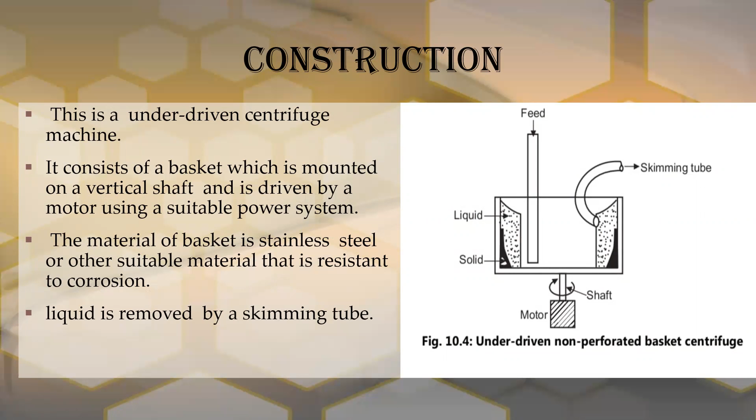Next point, uses of this centrifuge. This type of non-perforated basket centrifuge is useful for separation of solid and liquid from a suspension containing a high proportion of solid, that is, in cases where the solid offers high resistance to the flow of liquid.

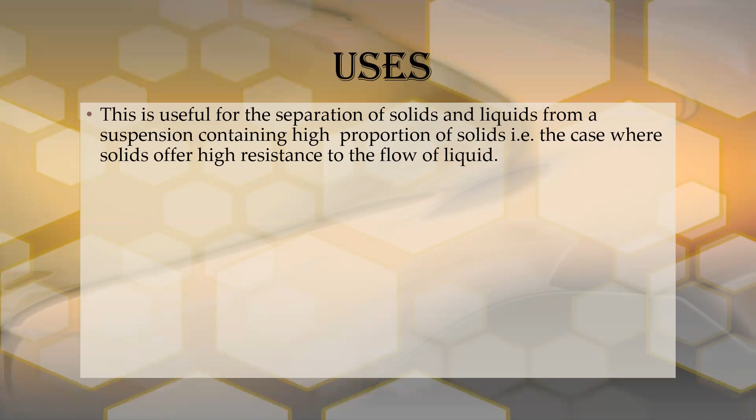Next point, there is next equipment or next centrifuge, that is semi-continuous centrifuge. So the principle of this semi-continuous centrifuge: it is a short cycle automatic filtration type batch centrifuge, a simple short cycle automatic filtration type of batch centrifuge.

The separation of the solid and the liquid is through the perforation wall, similar to a perforated basket, which is based upon the difference in density of the two phases, that is the density of the solid particles and the liquid phase. So this is the principle of this semi-continuous centrifuge.

Next point, construction of this semi-continuous centrifuge. See the diagram, it consists of a perforated basket, a vertical perforated basket. This basket is supported by a horizontal shaft which is driven by the motor. There is a feed pipe and wash pipe introduced at the center.

The diaphragm valve blocks the entry of slurry, and the hydraulic cylinder is activated. It lifts the knife along with the discharge chute. The knife cuts off the cake to a certain level, but not completely.

This knife will cut off the cake at a certain level. While the basket is revolving, the cake deposited on it will be cut out by this knife.

The remaining level of cake acts as a filter medium for the separation in the next cycle.

The diaphragm valve controls all the steps through the timer and air supply mechanism. So the entire cycle is semi-automatic, hence it is called a semi-continuous centrifuge. This is the simple working of the semi-continuous centrifuge.

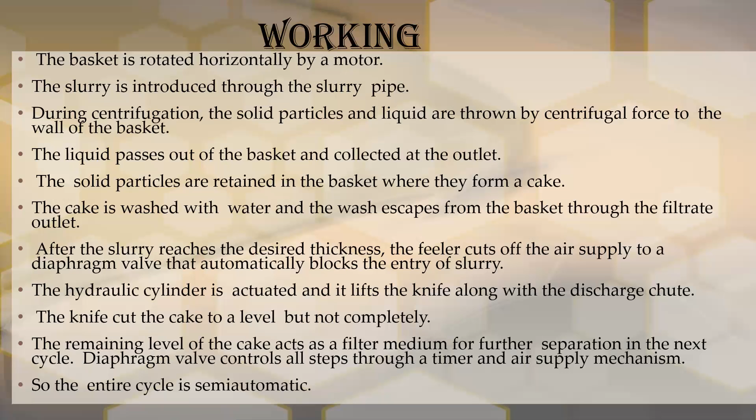Next, uses of this semi-continuous centrifuge. First use: crystals of drugs or material can be separated from the mother liquor.

Second use: liquid can be clarified by removing unwanted solid dirt from the oil. So these are the uses.

Next point, advantages: as the process is semi-automatic, it saves time and energy.

Second, it is used when the solid can be drained faster from the basket. So these are the two advantages.

Next, disadvantages. First disadvantage, this centrifuge involves many moving parts, making construction and working complicated. This centrifuge consists of a number of parts: diaphragm valve, feed pipe, hydraulic cylinder, discharge chute, knives, rotating basket, and motor driven mechanism. So the construction of this centrifuge and its working is complicated.

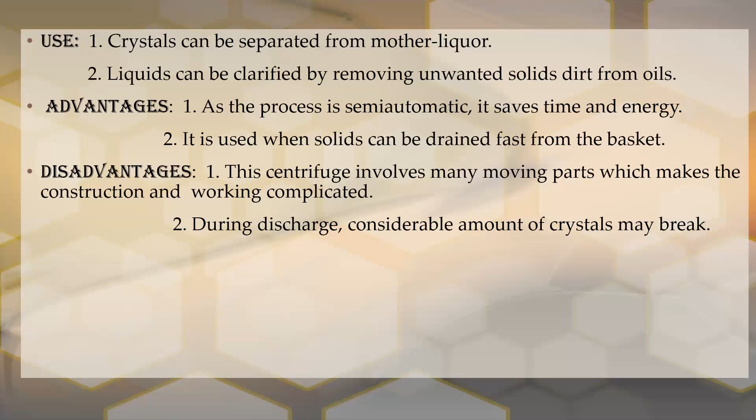Next equipment, which is the super centrifuge. Principle of the super centrifuge: it is a solid bowl type of continuous sedimentation centrifuge. So the semi-continuous is filtration type, and the super centrifuge is a solid bowl type continuous sedimentation type centrifuge.

Similarly, the mechanism of sedimentation is similar in this non-perforated centrifuge. So it is used for separating two immiscible liquid phases.

The separation is based upon the density differences between the two immiscible liquids. The super centrifuge separates two immiscible phases based on their density differences. During the centrifugation, the heavier liquid is thrown against the wall.

During the centrifugation process, the heavier liquid will be thrown onto the wall of the bowl, and the lighter liquid will remain at the inner layer. These two layers are

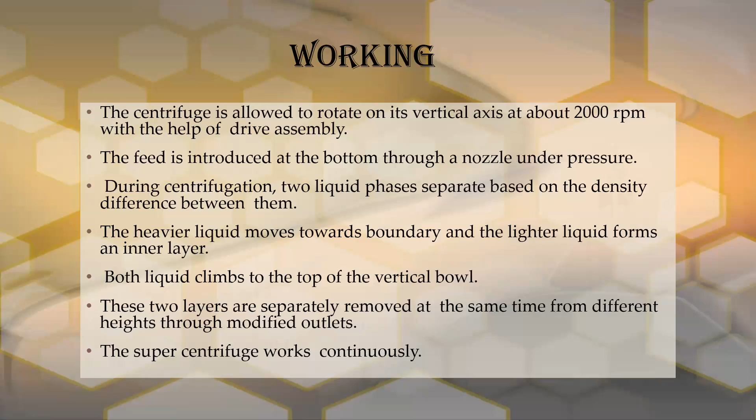First, the feed or mixture of two immiscible phases enters through the feed into the bowl. The bowl is rotated, the heavier liquid is thrown onto the wall, and the lighter liquid remains at the inner side of the wall.

The heavier liquid is removed from one outlet. After continuous operation, both the heavy liquid and the light liquid climb to the top and are removed from two different outlets - heavy liquid from one outlet, lighter liquid from the other. With fresh feeding, there is continuous separation of both phases, so centrifugation is a continuous process.

Next point, uses of this super centrifuge. It is used to separate the liquid phases of emulsions in food and pharmaceuticals.

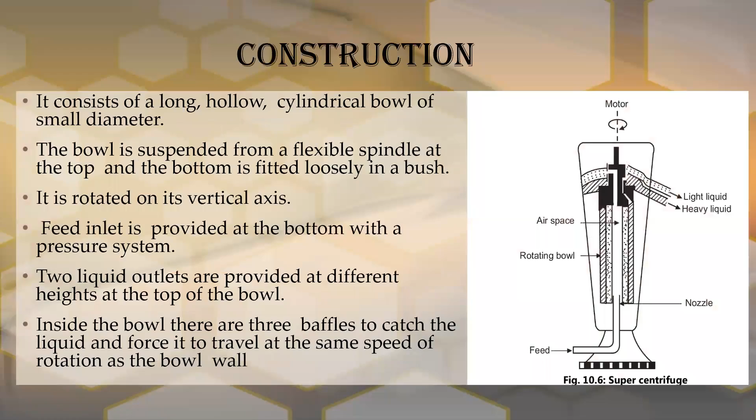So we complete our chapter on centrifugation. Centrifugation is the separation of solid particles from a heterogeneous mixture by using centrifugal force in centrifuge equipment. The first equipment is the perforated basket centrifuge.

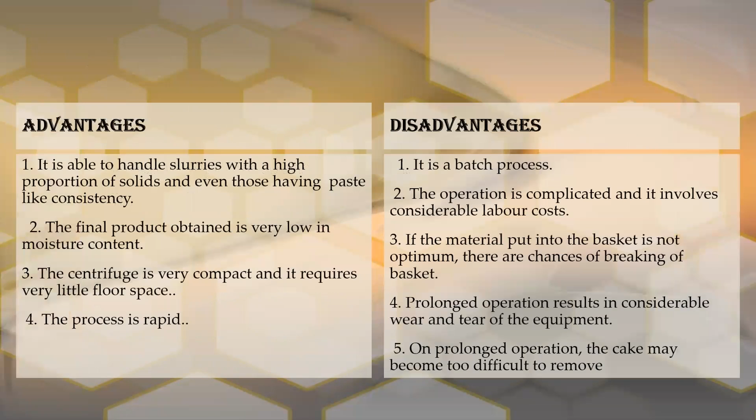In this perforated basket centrifuge, there are two types: batch type, and semi-continuous and continuous type. The batch type is a filtration type, and the semi-continuous is also a filtration type of centrifuge mechanism.

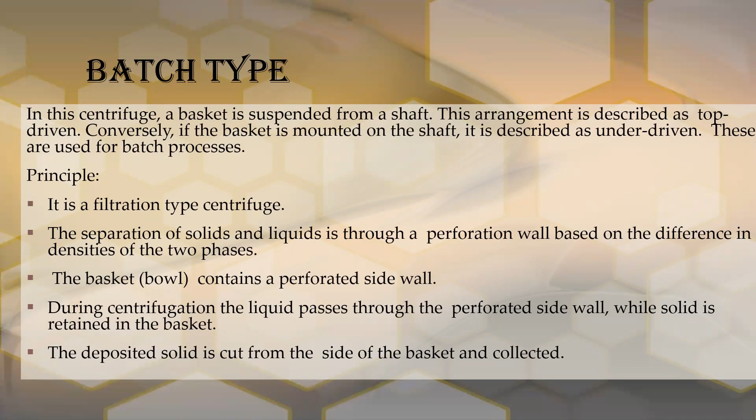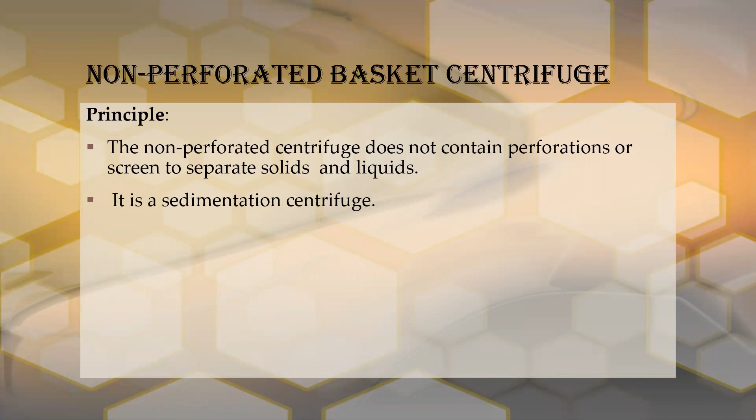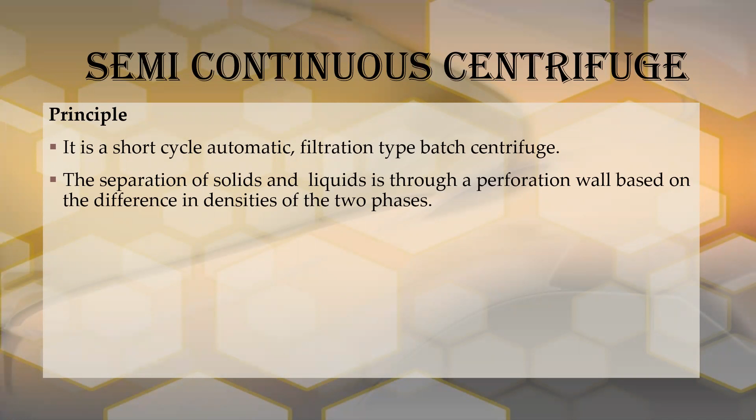Next is the non-perforated centrifuge, which is a sedimentation type of centrifuge, and similar to the perforated type, it has a semi-continuous version. The same mechanism is used in the batch type of filtration centrifuge as in the semi-continuous centrifuge.

And last is the super centrifuge, which uses the same mechanism, sedimentation centrifuge, used for separation of material. So we complete this centrifugation chapter. We stop here.